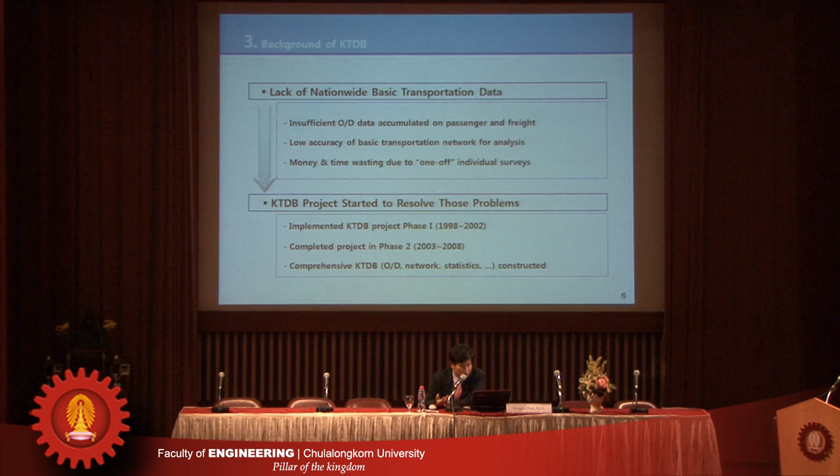The advantage of having a KTDB is that before we had one, each research project had to collect its own data or conduct travel surveys, which wasted money. Also, the accuracy of traffic analysis models wasn't good enough because it depended on individual researchers or professors at the time, and we didn't have sufficient data at the national level for both passengers and freight.

Given this background, the Korean government started establishing the KTDB in 1998. The basic objective of KTDB is to support national transport policy and plans, build a comprehensive and systematic database, and allow anybody or any organization to access this data without payment.

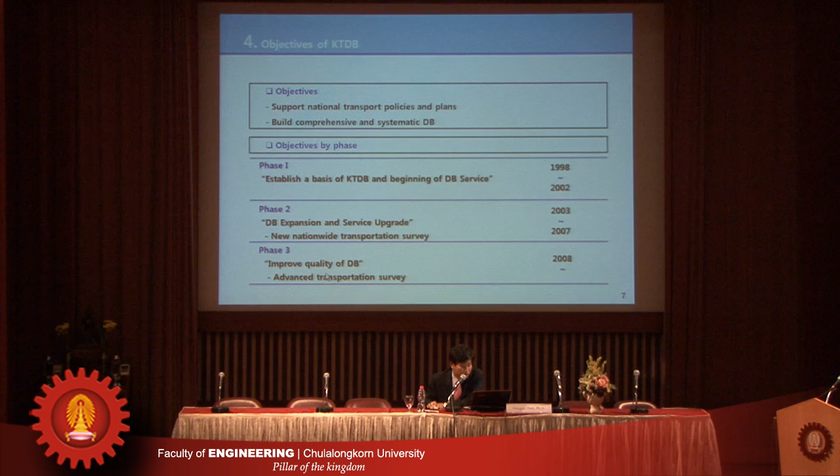We completed Phase 1 from 1998 through 2002, during which we established the basic structure and architecture of the transportation database. In Phase 2, we extended the coverage and level of service of the database. Now we are in Phase 3, trying to improve the quality of the database, mainly by using advanced transportation surveys like PDA or GPS.

So this is a brief idea about how the KTDB has been used. In Korea, every organization has to use KTDB by law to do traffic analysis. For example, like in Thailand with ETA.

Let's assume ETA wants to build a new expressway. In Korea, they would have to pass a feasibility study, and to do that feasibility study, ETA would have to use the database provided by KTDB. Otherwise, the government doesn't allow the project.

So every organization in Korea uses the KTDB by law for traffic volume or demand forecasting, national transportation network planning, analysis of key national transport policies, and infrastructure planning including roads, highways, logistics terminals, airports, seaports, whatever.

Here is how KTDB works: academics, individuals, consulting companies, and other technology vendors use the KTDB database. Central government, local government, and related organizations must also use KTDB for traffic analysis, and sometimes they have to provide their basic traffic statistics.

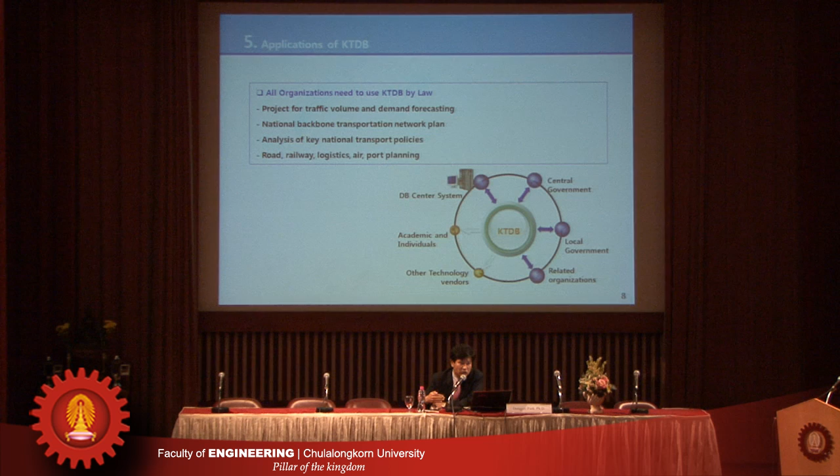For example, we have the Korea Highway Corporation, similar to ETA in Thailand, which must provide traffic data on vehicles using Korean expressways by law. The Korea Railway Corporation must also provide travel data between each railway station to the KTDB by law. This is how KTDB collects much more data.

This is the organization structure of KTDB. We have the Ministry of Land, Transport and Maritime Affairs, and under this umbrella, the Korea Transport Institute, called KOTI. Under this research institute, we have a small center called the KTDB Center, which is actually the host of the KTDB.

To support the technical aspect, we operate a technical support committee, which consists of professors and doctors in Korea and other advanced countries who support the technical aspects of the KTDB.

We also have a KTDB audit committee. Every year, this committee checks the survey plan and the output of the KTDB, trying to control and maintain the quality of the database.

KTDB centers sometimes employ survey agencies for surveys or data analysis, and also utilize GIS companies to build transportation thematic maps or networks. They also pay system integration companies like Samsung SDS or SK C&C to take care of database management, distribution, and software development.

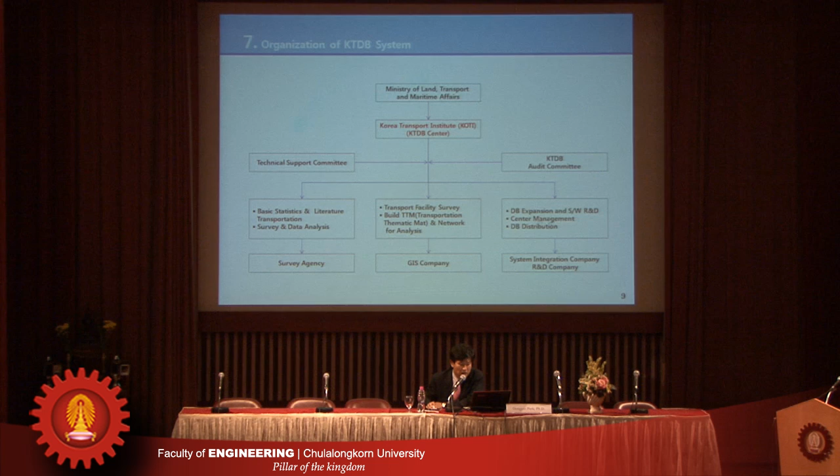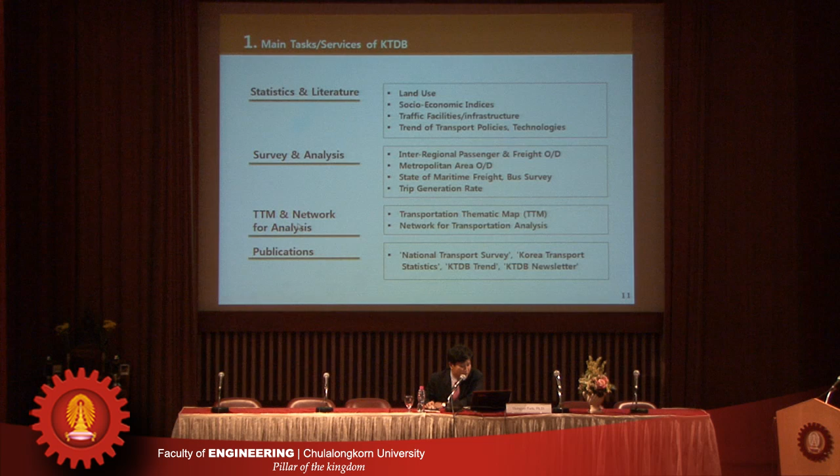Now I'm going to go into detail about the KTDB. As I mentioned, the main tasks or services of KTDB consist of four areas: basic statistics and literature, surveys and analysis, transportation thematic maps and networks for analysis, and publications.

This is about the basic statistics and literature. KTDB centers have collected the basic statistics necessary for travel demand analysis, such as population for each traffic analysis zone and number of employees or statistical information by each sector. KTDB also collects literature about transportation policy trends, not only about Korea but other countries, and trends in transportation technologies. They provide this information to anybody through the internet.

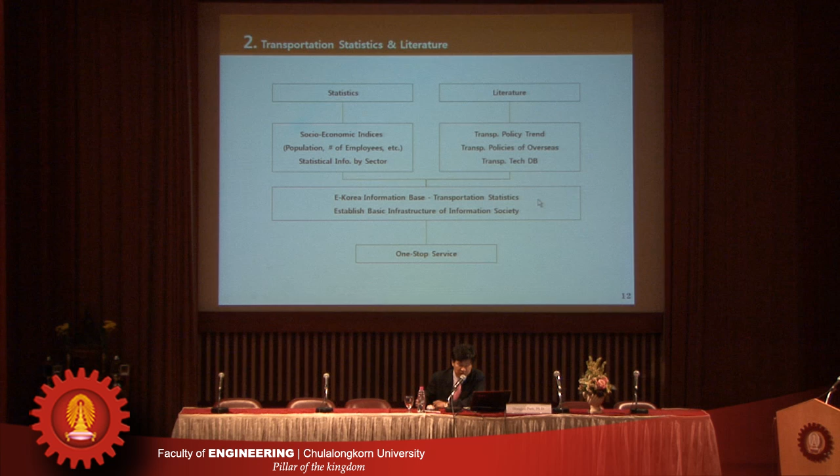The main service or main task of KTDB, I think, is the passenger surveys. For passenger surveys, we usually do roadside interviews, postcards, traffic counting, or passenger surveys, which are the standard ways to collect data about how many people are traveling from where to where. So we collect the trip purpose, origin, destination, mode, and travel time - those basic data.

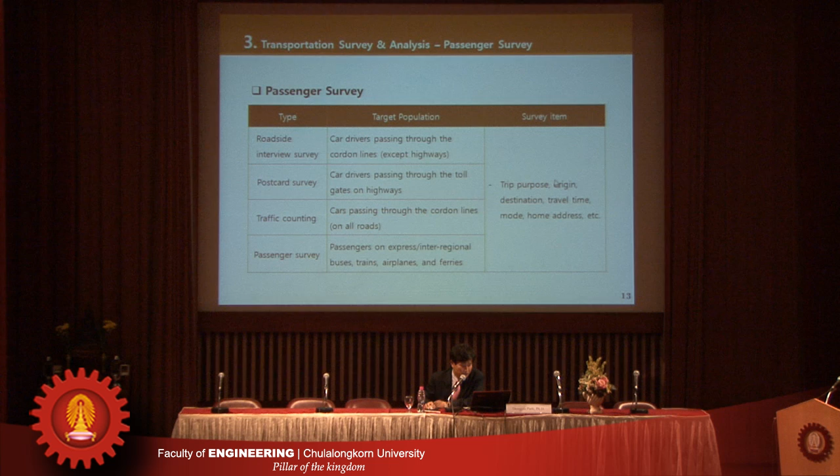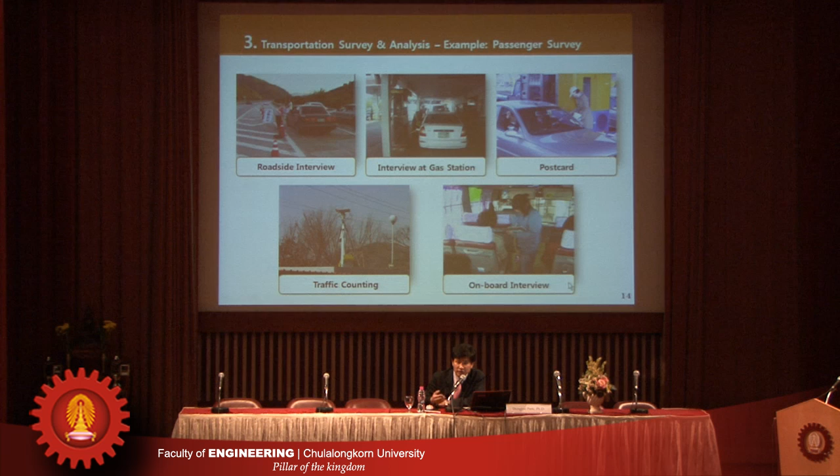Another big survey about KTDB is the commodity flow survey. Like in America, I know there is a Freight Analysis Framework, and we have similar work here, so we estimate the freight origin and destination tables.

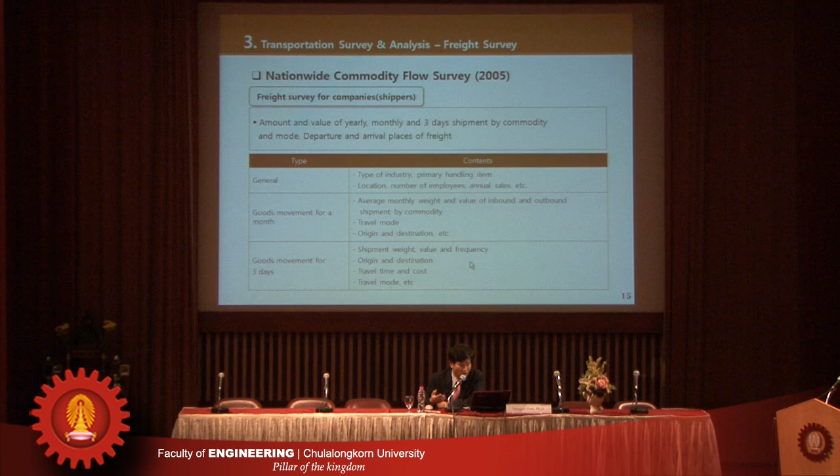We do surveys about shippers, in other words the companies. We collect data about general things about the company, like location, number of employees, or annual sales, and also we collect data about goods movement for about 1 month or 3 days - what is the origin and destination, what is the shipment weight, what is the value for each ton, what is the shipment frequency, and what is the travel mode and travel times, something like this.

Also, we are surveying the itinerary of truck drivers. We collect data about vehicle characteristics, such as vehicle type and capacity, and also trip characteristics, even the tour, like travel date, origin, start time, destination, arrival time, freight items, and travel distance or travel frequency, something like this.

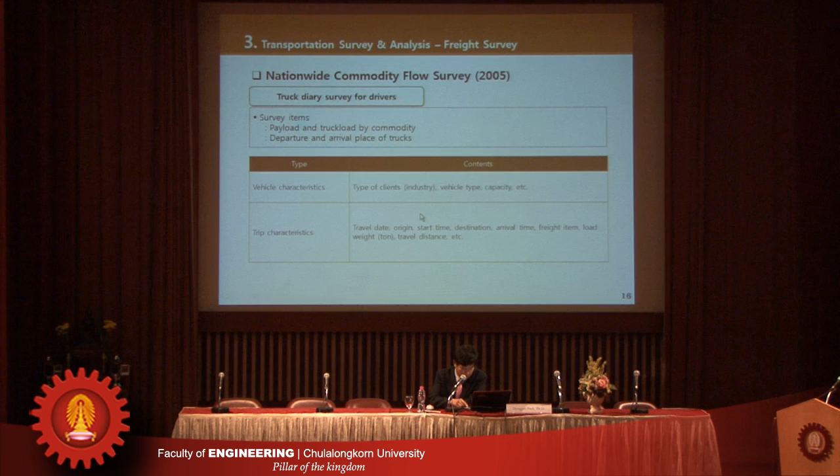To validate the freight OD tables, we are trying to survey freight movement at the intermodal or multimodal terminals, such as truck terminals, inland container depots, railway stations, or airports. We survey the vehicle types, the origin and destination of each truck, the commodities, and the average load weight.

Also, to validate the freight OD tables, we count the truck traffic volumes around the industrial parks.

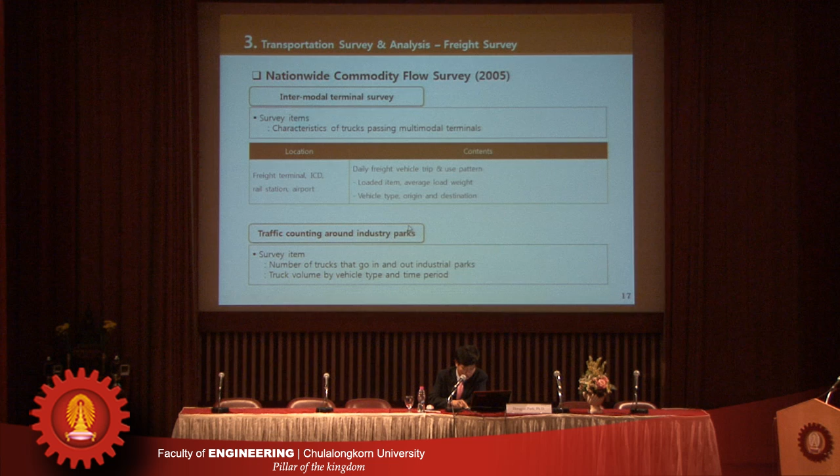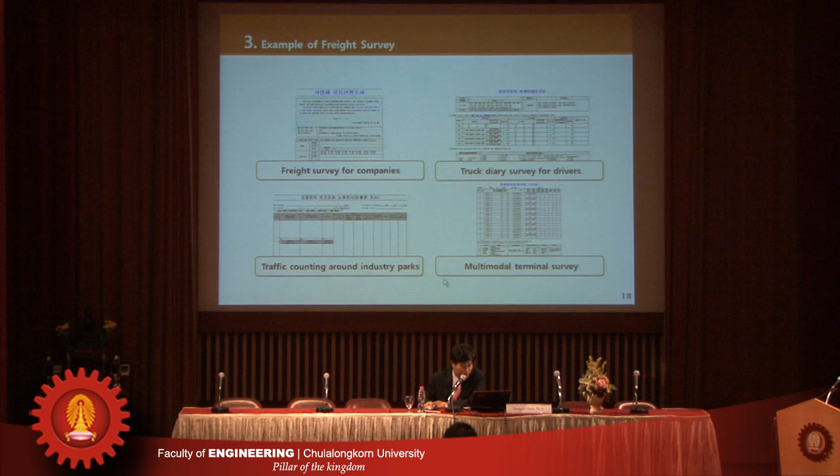Those are examples of survey sheets. This is the survey form for shippers or companies, this is the truck diary survey for truck drivers, this is the traffic counting form around industrial parks, and this is a survey sheet for intermodal terminal surveys.

After the survey, we estimate freight OD and passenger ODs. For the national level, like inter-regional OD tables, we provide passenger OD tables and freight OD tables, dividing entire South Korea into 248 traffic analysis zones. We provide the freight and passenger OD tables every 5 years, like 2011 and 2016, projecting into the future about 20 or 25 years.

Not only do we provide inter-regional OD tables, but also passenger and freight OD tables for metropolitan areas. We are estimating the metropolitan area OD tables for 5 metropolitan areas, like Seoul, Busan, Ulsan, Daegu, Gwangju, and Daejeon. The estimated and predicted years are the same as the inter-regional OD tables.

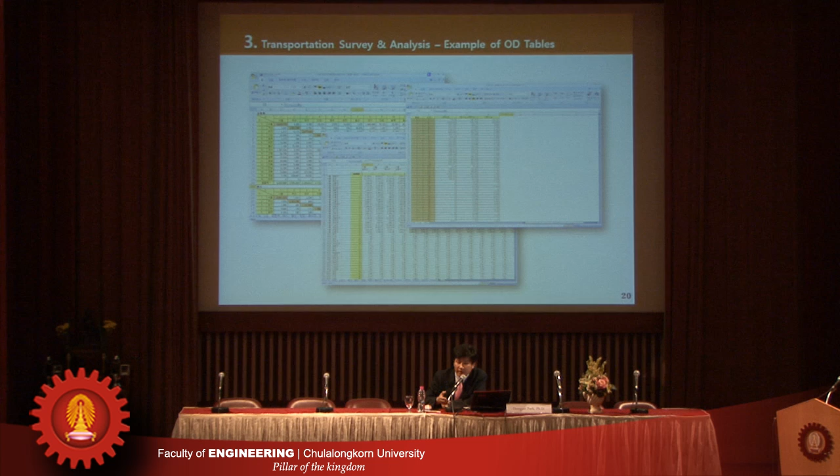Those are the pictures of Excel files about the freight and passenger OD tables that we are providing for the public.

Another way that we are doing the survey is to use advanced technologies. This is the map of Jeju Island, the biggest and most beautiful island of South Korea. From about 10 days later, the 2011 EASTS Conference, Eastern Asia Society for Transportation Studies Conference, will be held on this island. Here is Jeju city and around it, one of the points is the airport, and this is Seogwipo, where we are having the conference.

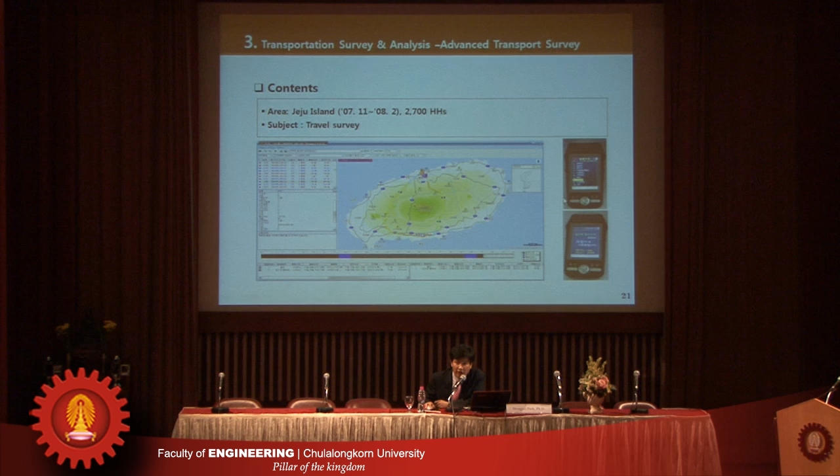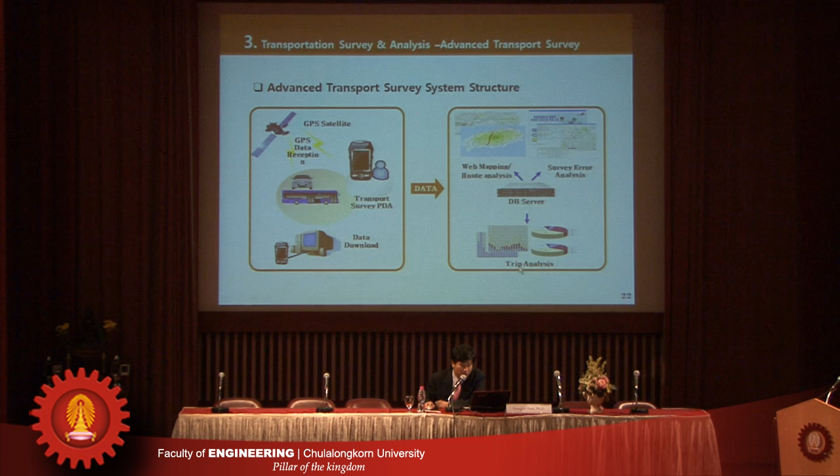From 2007 to 2008, we surveyed travel behavior of 2,700 households using PDAs, not just traditional ways. Using GPS systems, PDAs and computers, we collected data about the routes, analyzed the survey error using the data, and conducted trip analysis using the results of these advanced surveys.

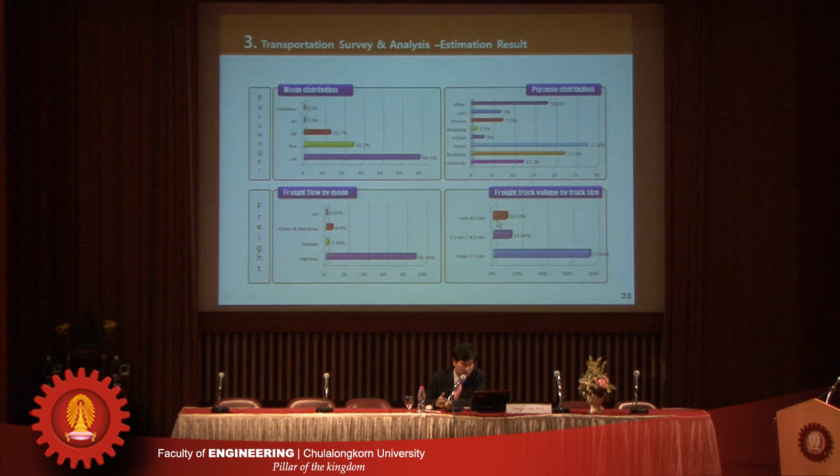This is an example of estimation results, like mode share and trip purpose of passengers, and mode share of freight flow and truck volumes by truck types. In Korea, about 75% of commodities are transported by small trucks less than 2.5 tons, about 13% by middle size trucks, and about 11% by big trucks.

Another service of KTDB is thematic maps and networks. We are building and providing digital maps with activity information on traffic facilities like railways or roads based on national GIS systems. We also provide the network for transportation analysis like roads, railway or airlines. So when you do a feasibility study or travel estimation study, you don't need to create the transportation network yourself. The KTDB provides the basic transportation networks for every part of the country.

The things you have to do is modify some errors made by the KTDB centers. So it's very convenient, and you can save a lot of money and time for feasibility studies. Using this thematic map and network, we can study ITS or feasibility evaluation or transportation network plans very easily.

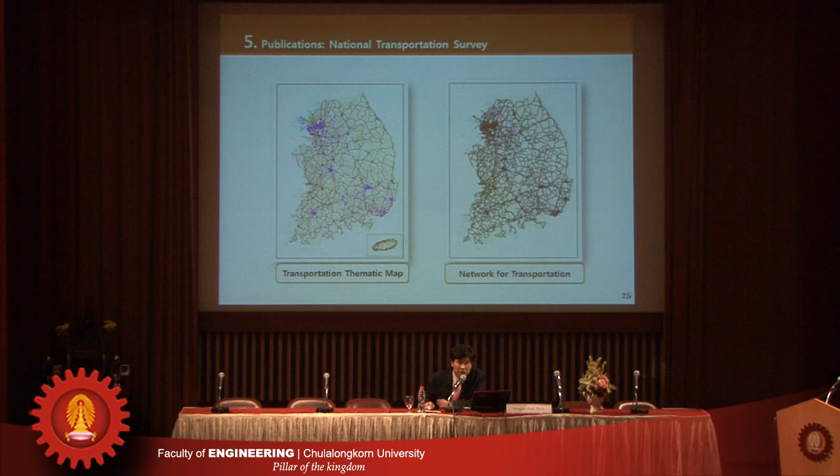Those are examples of transportation thematic maps on the left-hand side, and the right-hand side is the digital maps for transportation studies. Usually when we do travel studies using EMME, Cube, TransCAD or TRIPS, we are using these digital maps given by the KTDB centers.

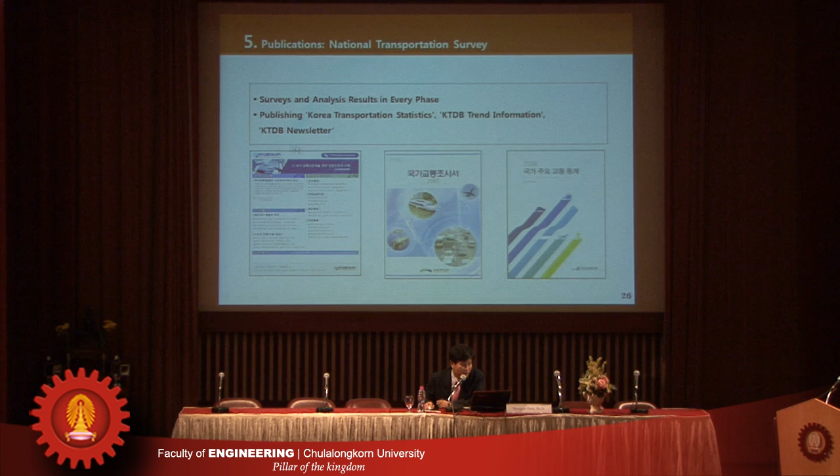Another job of KTDB center is to publish magazines, like the Korea transportation statistics, KTDB trend information, or KTDB newsletters regularly. Another job of KTDB center is to publish the transportation survey manual so that everybody can understand, and standardized survey methods can be kept for a long time without mistakes, even though experienced people do not work there. Everybody can do the same things with these manuals.

Next is about the application of the KTDB. As you saw in the video, this is the URL of KTDB Center, ktdb.go.kr. On this website, you can get transportation thematic maps, survey and analysis results, transportation basic statistics databases, networks, or O/D tables for passenger and freight without any payment, and you can download very easily through the internet.

Using this transportation facility data, we can make a GIS analysis. Using national travel O/D data, we can do feasibility analysis of transportation infrastructure investment very easily. We can use the traffic statistics and documents, and also use the transportation policy surveys very easily, because if you just visit the website, you can download everything there.

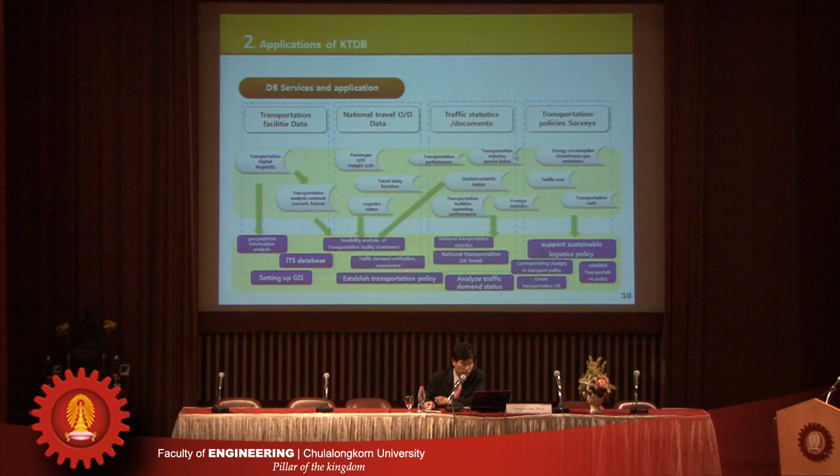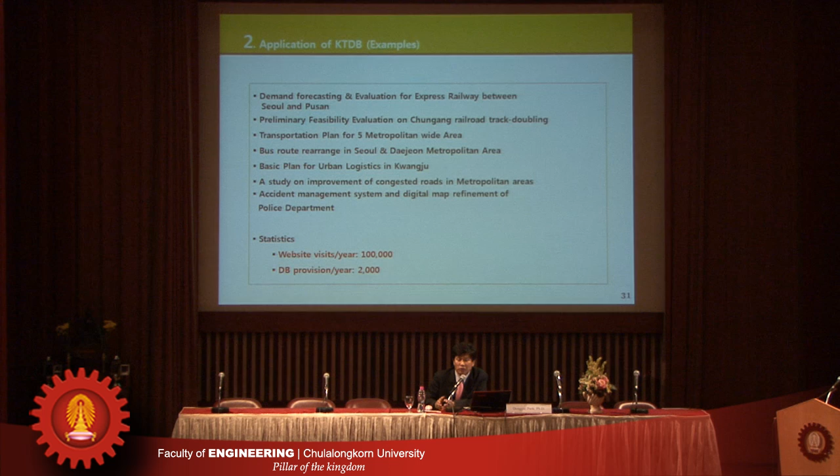Those are some examples of KTDB use, like demand forecasting and feasibility study for the express railway between Seoul and Busan, like a Shinkansen or TGV or ICE in Germany. We have KTX, the express train. About 3 years ago, I used the KTDB database for the feasibility study of the extension of KTX around the Seoul metropolitan area, and we can also use the freight data.